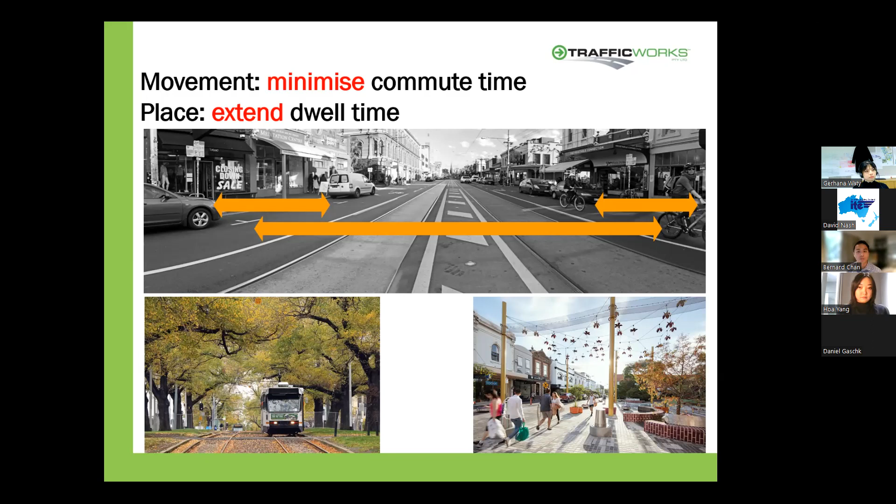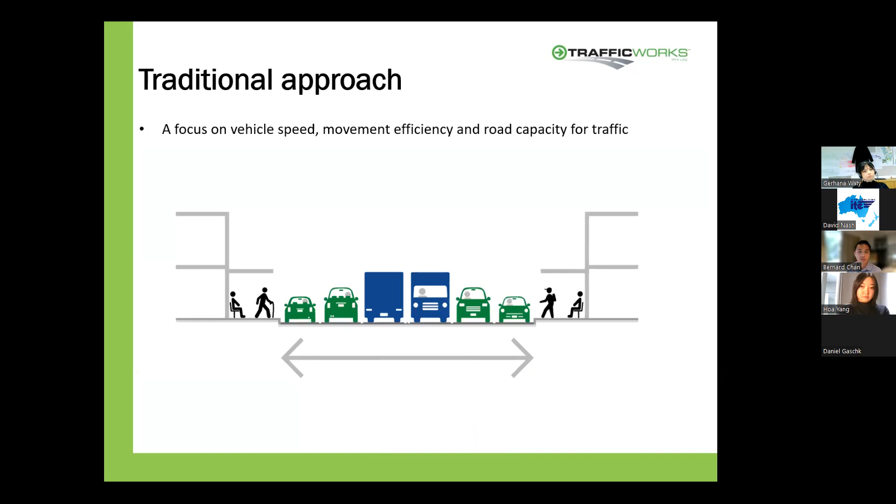15 years ago, we focused on vehicle speed, movement efficiency and capacity—that was our traditional approach. It was all about moving how many vehicles, mostly cars and trucks, we could move, and a focus on dedicating road space to these vehicles.

About 10 years ago, we made a step change to smart roads and included on-road public transport, pedestrians and cyclists, and shifted our thinking to the number of people we're moving, not just the number of vehicles.

And now, movement and place takes us to the next step. It's an integrated transport approach, bringing together transport and land use. So we're also now taking into account what's happening on the side of the roads and treating roads and streets as places in their own right.

Movement and place is not a new concept, and we're not the only ones adopting this—it's happening everywhere around the world. There's quite an international community of practice, and we're not reinventing the wheel. We're just taking the parts that work to suit a Victorian context from other states and countries. So the Victorian movement and place framework is largely based on London's Link and Place, and it's just evolved from there.

Let's talk a little bit about the street space allocation challenge, as I'm sure a lot of you will be experiencing. When planning and designing streets, the allocation of street space is always strongly contested. This is particularly the case in locations such as activity centres, where there's high traffic flow conflicts with popular places and key destinations. So movement and place can really help us with that challenge to allocate the road space equitably.

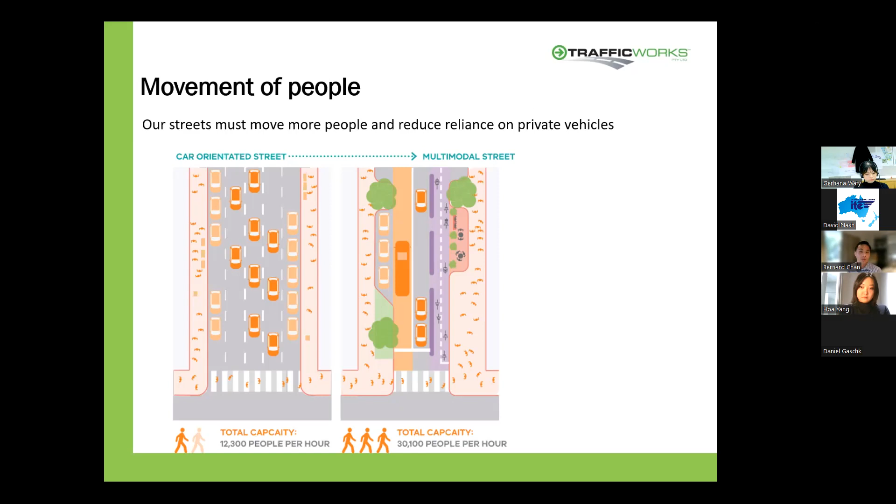In September last year, a study was commissioned by RMIT and Monash University. In that study, they looked at 57 sites located in major activity centres, around 10 kilometres radius from the Melbourne CBD. Each of these sites was measured in terms of the amount of street width provided and used by each mode of transport.

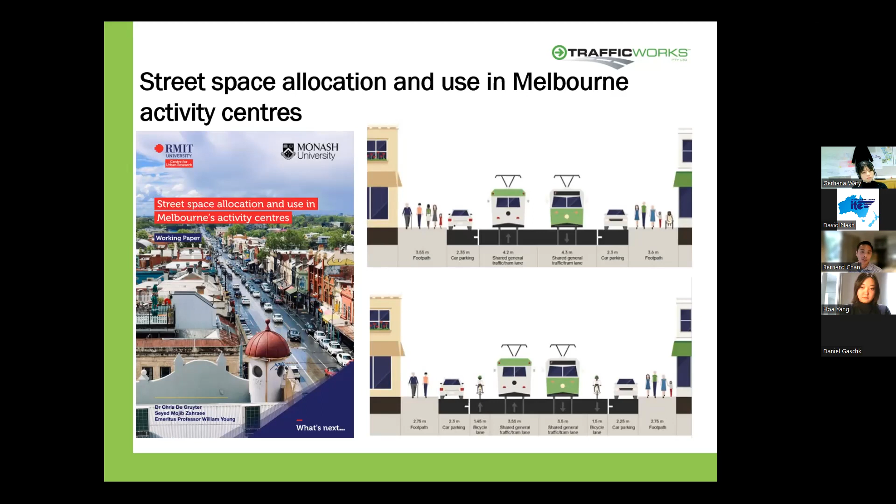An understanding of current street space allocation and use can really help us identify locations where street space could be allocated more equitably to users. This is particularly relevant in areas where movement and place objectives are in conflict with one another, such as in activity centres. In the study, observational person counts were undertaken, and these were classified by transport modes.

These measurements were undertaken at each site and converted to a concentration of people per kilometre to determine the usage of each mode. It was found that when averaged across all sites, space for pedestrians was significantly undersupplied. Footpaths accounted for only 33% of the total street space, yet pedestrians accounted for over 56% of the people per kilometre of road space.

The exclusive tram lanes, general traffic lanes, and tram and bus lanes were found to be slightly oversupplied. The elements found to be greatly oversupplied were on-street car parking, shared general traffic and bus lanes, and surprisingly, bicycle lanes.

A key takeaway from the findings is that space for pedestrians could really be increased at some activity centres. This could potentially be done through converting existing on-street parking, as in the case with the recent emergence of parklets. However, there is great variability between sites, which highlights the importance of a site-specific approach. So this is where the movement and place approach comes in.

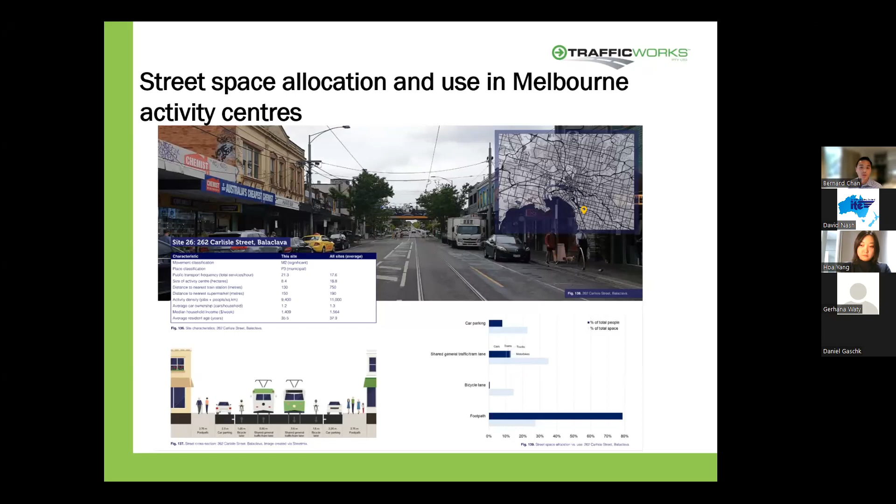I'll give a brief overview of the Victorian Movement and Place framework.

The framework examines the vision and performance of transport links against four themes: movement, place, safety, and the environment. The process to assess how these links are performing against the aspirational states takes us through four different modules of the framework: network classifications, network performance, options development, and options assessment. I'll briefly cover those four modules now.

Module 1, network classifications - this is where each link of road can be plotted in a 5x5 matrix. Each classification has a definition, with place classified from P1 to P5, with P1 being a state significant place, right down to P5, which might be a local street that you live in.

Movement also has classifications level 1 to 5, with M1 being corridors catering for mass movement of people and goods, so your freeways and major highways, all the way down to an M5, which might be your local streets.

The movement classification itself, however, doesn't add a lot of value until you unpack the different modes of transport that make up the M classification. In our framework, there are 8 different transport modes recognized: rail, tram, bus, interchange, walking, cycling, freight, and general traffic. Each of these transport modes also has its own classification system.

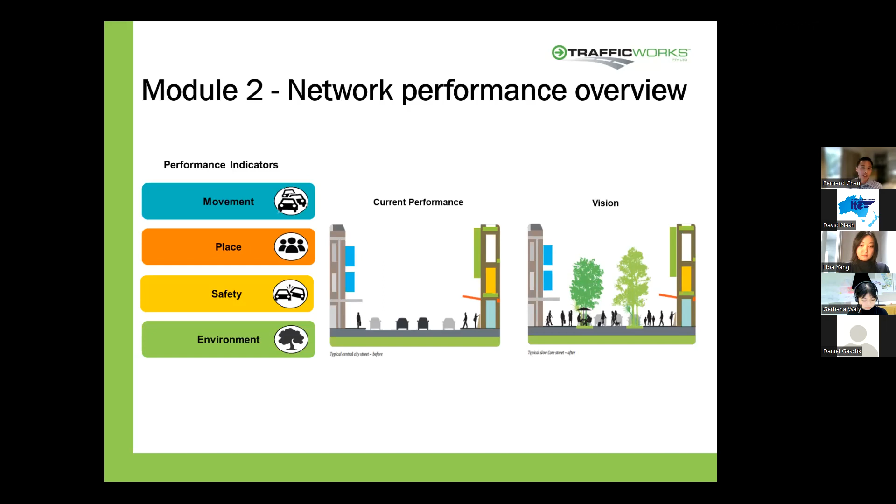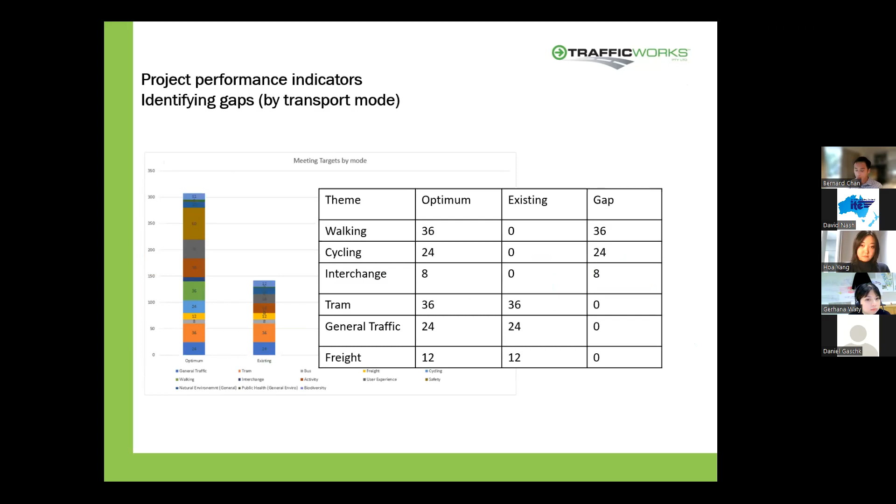Once we have an understanding of the gaps in your project, we can then derive our strategic project objectives. This example here is just of Spencer Street outside Southern Cross Station. These objectives will help shape your project options, which, moving on to Module 3, is options development.

Once we've established our vision and examined it against our existing conditions to identify the gaps in the network, the next step is to identify our project options to address the identified gaps. There are a lot of guides that have been developed to assist with options development.

The first group of guides is our roads and street design guide, which consists of the urban roads and street design guide, the rural roads typologies, and the growth area handbook. There's also a series of modal design guides, so cycling guide, walking guide, etc. All of these design guides are supported by application guidance, such as the user guide and the movement and place technical appendix.

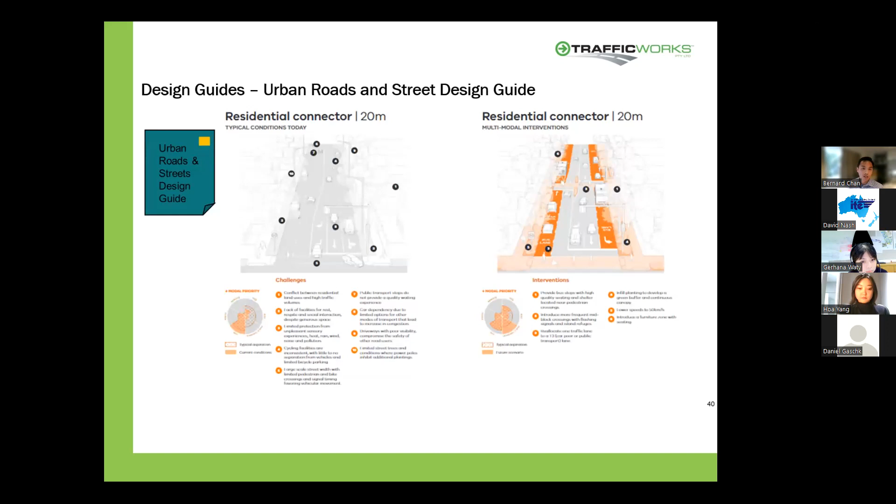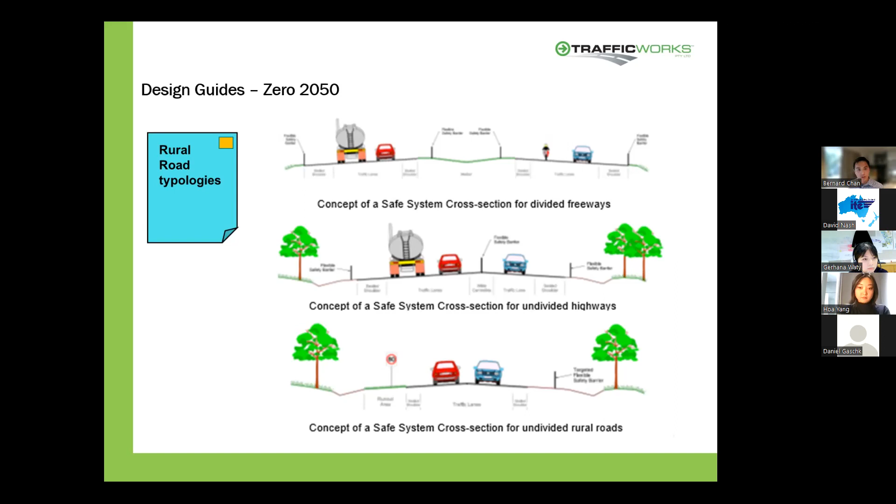It's also important to note that movement and place in Victoria applies to all roads, including high-speed rural roads. The rural road typologies guide will give cross sections for rural roads with a focus on safe system, making sure we've got a safe system cross section for all our rural roads.

So the framework can really help with providing that language and assist in creating that conversation in decisions on how to reallocate street space.

Now I'll talk about how movement and place can integrate different disciplines and the importance of doing that. The movement and place framework provides a unified approach to thinking about roads and streets, and allows practitioners to work together with different disciplines and perspectives to reach a shared understanding and collaboratively develop solutions, and also facilitates conversations between government, practitioners, and the community.

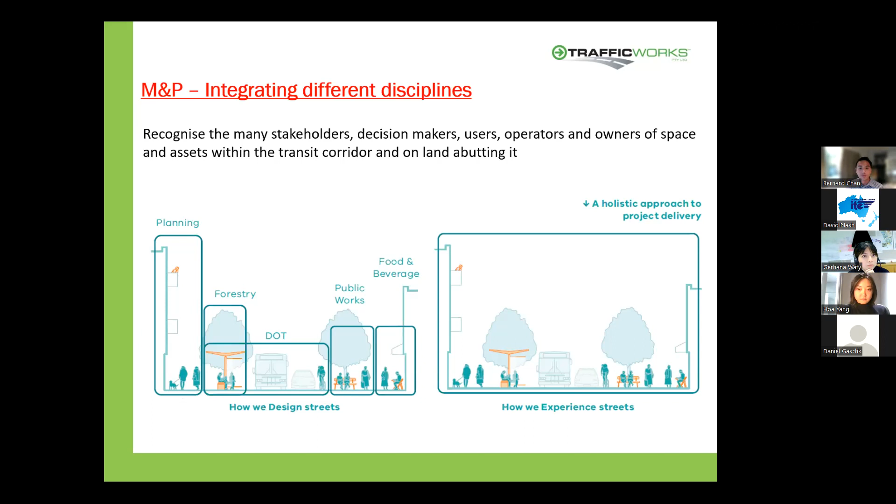This is a more local example, our very own early application of movement and place: the Ringwood Station upgrade and boulevard treatment. In this project, better priority for pedestrians was provided between the Eastland Shopping Centre and Ringwood train station with the implementation of a raised pedestrian crossing. With the introduction of the Ringwood bypass, this allowed Maroondah Highway to be reduced from 3 traffic lanes to 2 traffic lanes in each direction, and the speed limit was reduced from 60 to 40 kilometers per hour to better cater for pedestrians.

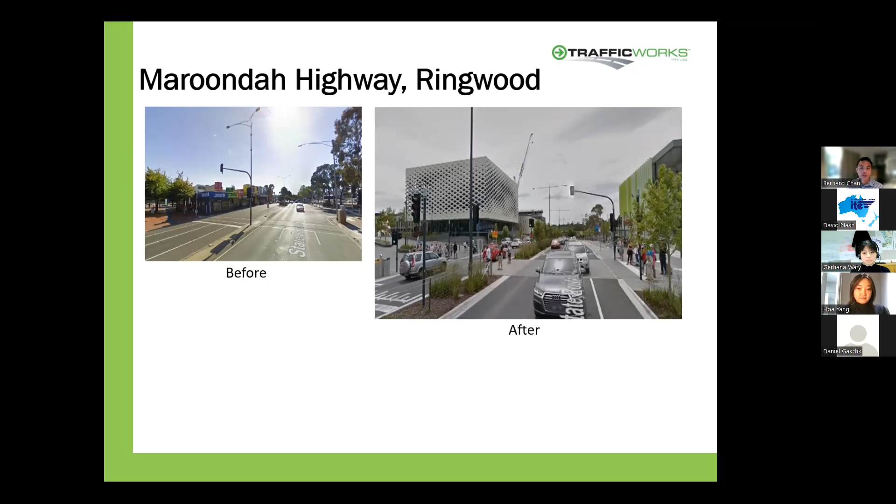Now I'll talk a bit about some examples of how movement and place has been applied in street design, and I'll talk through some of the projects I've been involved in.

Here's an example of a project that Trafficworks completed in partnership with Hansen for the Wyndham City Council. For this project, we reviewed the modal classifications for all the streets within the municipality, reviewed local strategies and future planned projects, and from that established the ultimate active transport network within the municipality. Each identified route was then categorized into street and path types, and this was used to inform a street design guide. Gerhana will talk a bit more about this project in her presentation.

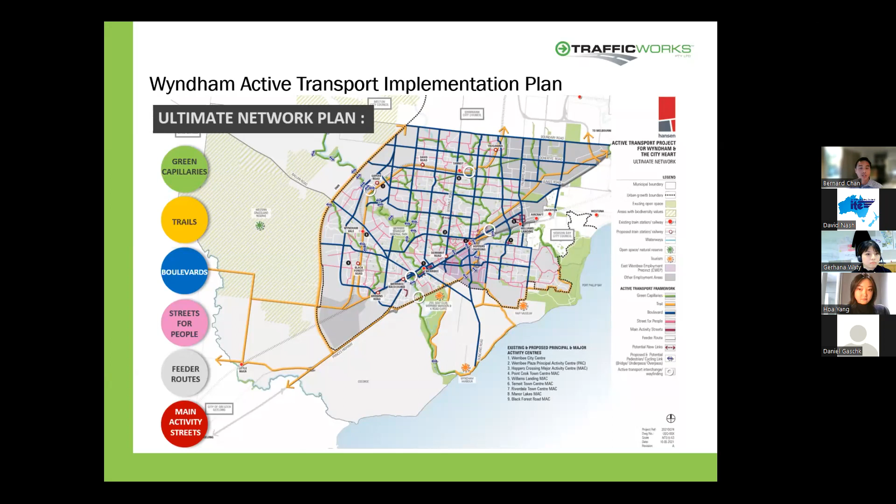This is another example of a project that we completed in partnership with Hansen. This involved the preparation of a street design guideline for the City of Glen Eira. So on this project, we married up the movement and place framework together with Council's integrated transport strategy to come up with a street design guideline that will assist them in determining street typologies and aspirations based on the road hierarchy and classifications. Gerhana will talk a bit more on this project. It's quite an interesting one on how movement and place was applied.

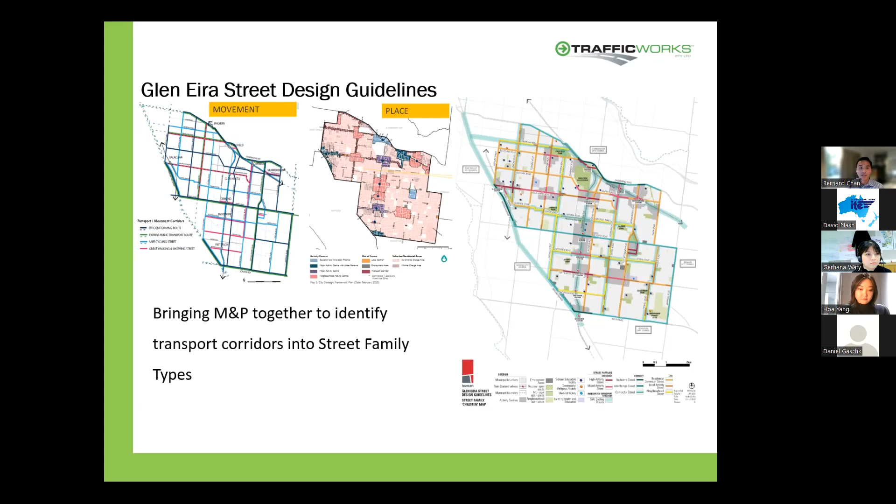We've also been using movement and place on various bicycle feasibility studies. So for a project that we did for City of Melbourne, for Courtney Street, movement and place thinking was adopted in identifying the benefits of a proposed road closure to improve bicycle and pedestrian safety. And another project we completed for Bayside, which involved identifying routes which were suitable for protected bicycle lanes. Movement and place classifications was utilized as a criteria in a multi-criteria analysis.

So in Flinders Street, we also looked at protected bicycle lane feasibility study for the City of Melbourne. This was quite a complex project, given Flinders Street has so many competing modes and limited road space. The movement and place framework was critical in understanding the modal priorities, and that was instrumental in helping us to establish the project options.

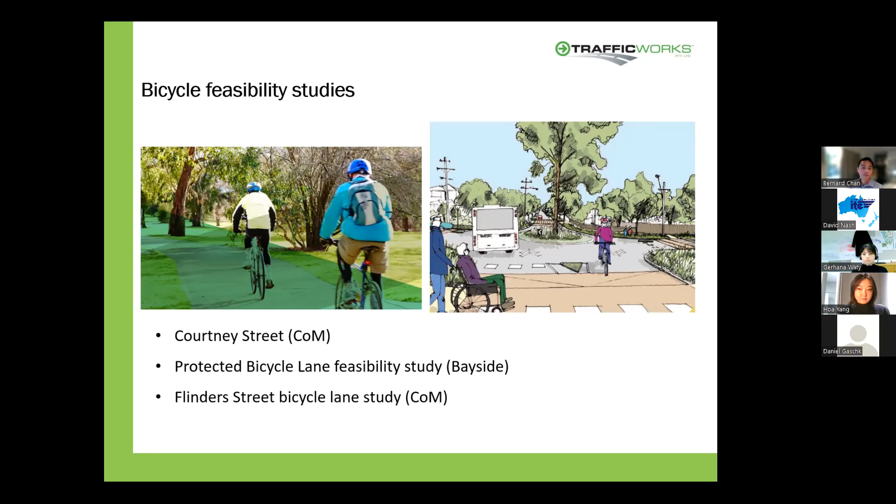It's also been used on a lot of streetscape projects that we've been involved in. So the first one was the Streets for People project we undertook in partnership with Hansen for the City of Darebin. The treatments that we recommended along each of the corridors that we looked at was based on movement and place classifications along the routes.

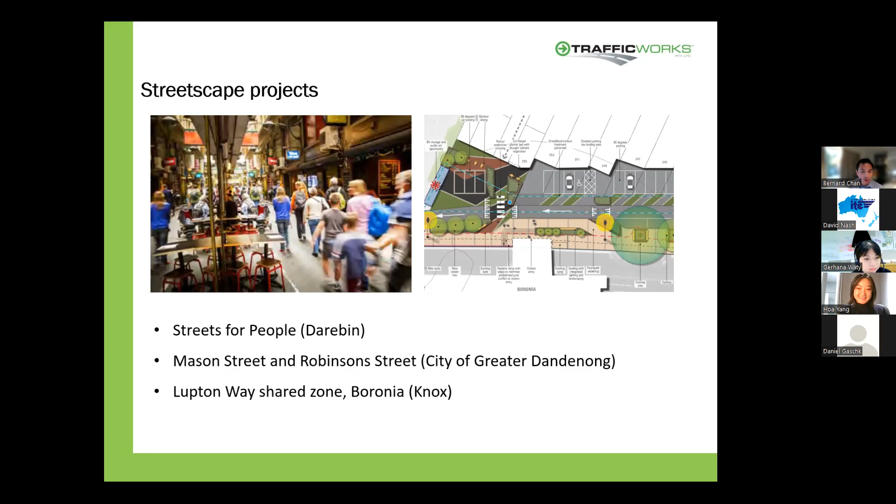The second one, Mason Street and Robinsons Street, that we completed for City of Greater Dandenong, again in partnership with Hansen, movement in place principles were adopted in the development of options. And the third one there, Lupton Way Shared Zone, was another interesting one that we completed again with Hansen, where there were competing pedestrian and cycling priorities with back of house loading and waste collection demands to balance.

Apart from projects, the framework can also be used in the road operations area. The signals area within Department of Transport uses movement in place to undertake signal route reviews. There's a guide and a number of matrices that looks like this one that helps prioritize modes at signalized intersections.

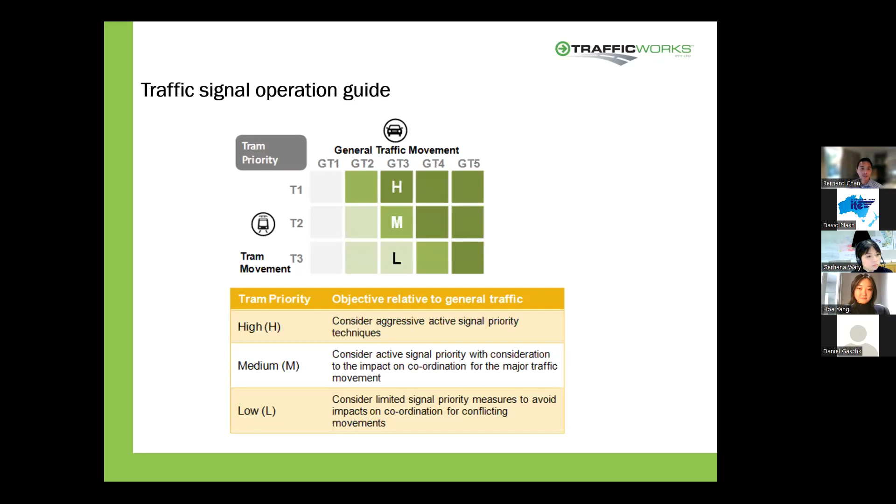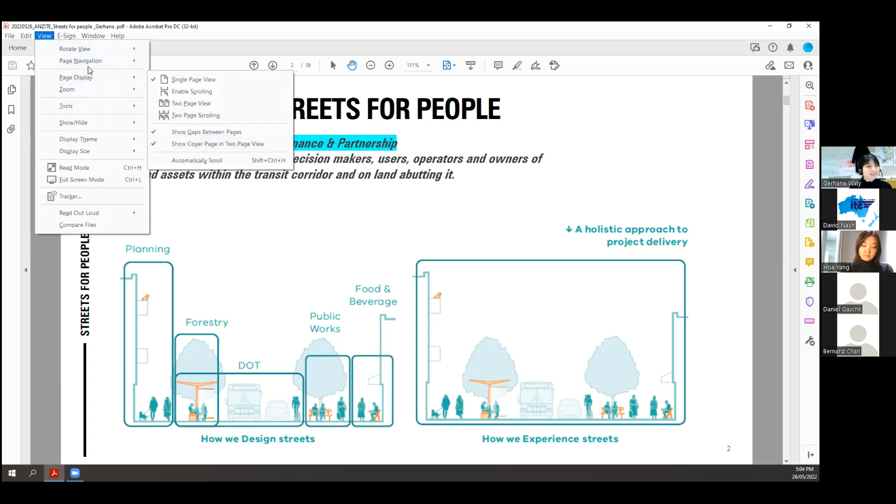That's part of the key ethos in terms of how we try to deliver these kinds of projects in partnership with Trafficworks.

The two projects I'm going to share with you - one is Glen Eira and one is Wyndham - are completely different contextual settings, very different in terms of landscape setting as well. But what's important is the strength of council strategies and the DOT movement and place framework in laying the foundation and providing a really useful starting point for us to deliver interesting and tangible outcomes over time.

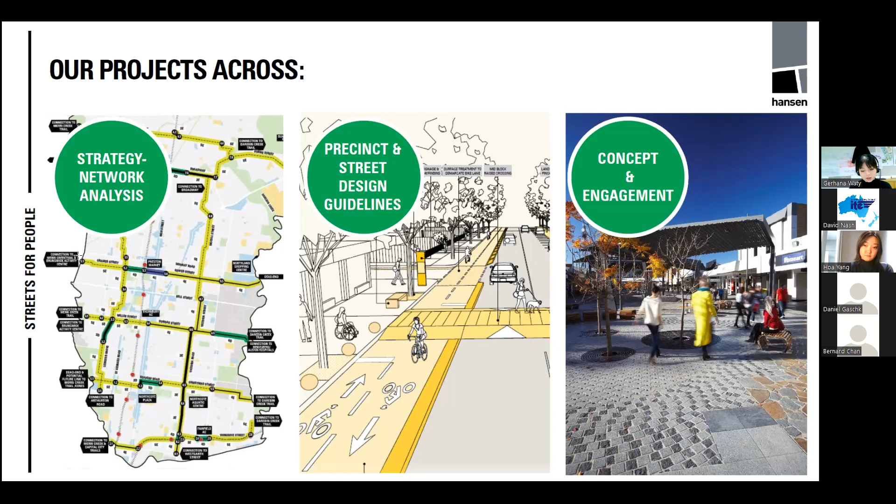So we all know where Glen Eira is - it's one of the middle ring suburbs, a very green municipality I must say, and pretty rich in public transport in terms of train, tram, buses and so on.

What's useful in the Glen Eira setting is that the council has declared that 50% of their transport or traffic will be transferred to active transport in the future. To deliver that kind of vision, they need a serious commitment to delivering good streets that support non-motorized transport.

In addition, they have other issues like urban heat island and depleting canopy tree planting within the public realm. So there are compounded issues that movement and place need to consider in addition to just the functionality of the transport modes.

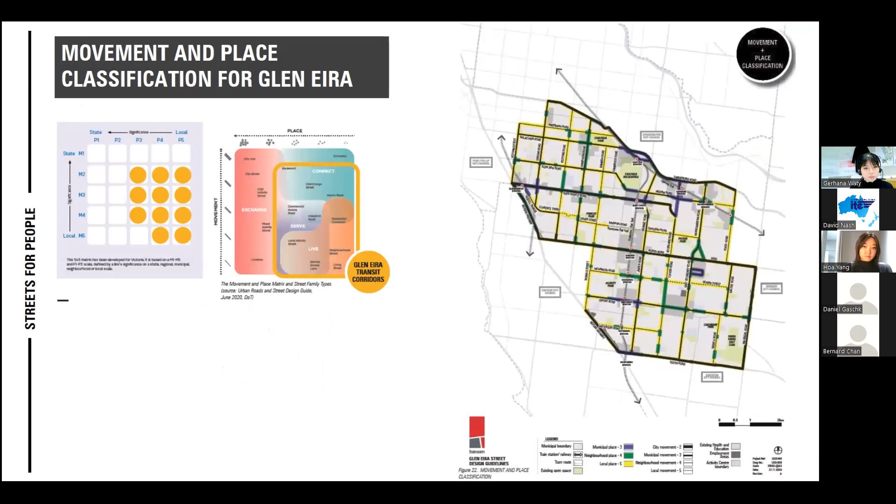So what we did in Glen Eira is really translate Council's ITS, which surprise surprise doesn't really line up with DOT's movement and place. For example, Centre Road in Bentleigh is identified as a great shopping walking street, which makes sense because it is a high street shopping environment.

However, the movement, general traffic and bus network has a very high level of classification, meaning they have high priority in terms of making sure general traffic actually goes through. So the two don't necessarily line up very well, but usefully DOT is also quite open to suggestions with regards to refining some of this movement and place, provided there is a strong justification and strategic rationale as to why those classifications must be reviewed or, in some instances, amended.

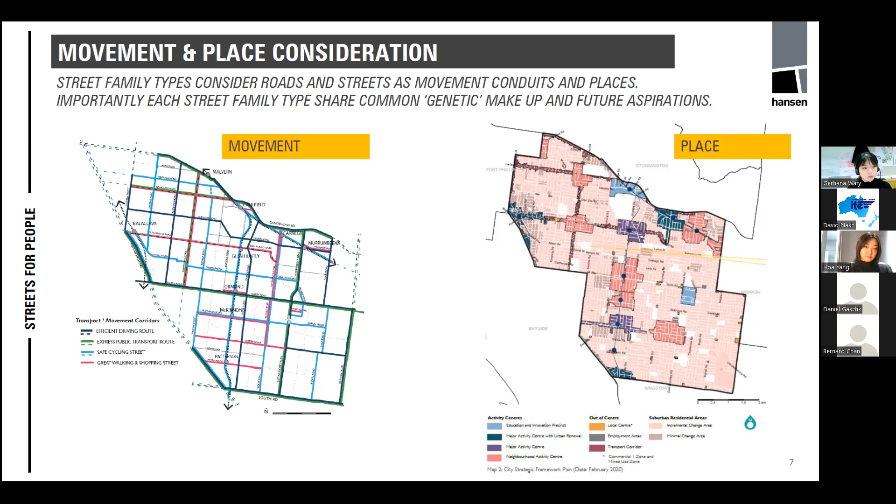A really good example is the East Village Urban Renewal Precinct, which previously was Industrial 1. So naturally the movement categorization or freight categorization is very high. But if we think about the strategic direction of where this place is going in the future, it's very much a people-oriented space. As such, the movement classification must be reviewed and amended to reflect the future designation of that place.

So without going into too much detail, helpfully what we did in the end is create a place-driven street typology to inform the aspiration and the modal priority of different streets within the strategic corridor of Glen Eira.

So whether it's still high general traffic movement, the aspiration in the ITS has a lot of strategic justification to demonstrate why place value is actually what drives the vision and what needs to happen in terms of prioritization of movement and efficiency for what the future street will look like. And mind you, it's not just the streets, it's also the land use implication on what will happen on sites abutting these strategic corridors.

Will future development support retail activity that spills onto the street? Will some of these streets support a cycling corridor that connects to schools and parks and whatnot? So all of this becomes a language, or a kit of parts, that the community, landowners and decision makers understand, can visualize, and can commit to with regards to its delivery.

So we're not talking in technical terms or technical language about general traffic classification, this and that. We talk about creating a boulevard here, creating a mixed activity street here. It has a different level of services, a different level of quality and vibe in terms of place for people.

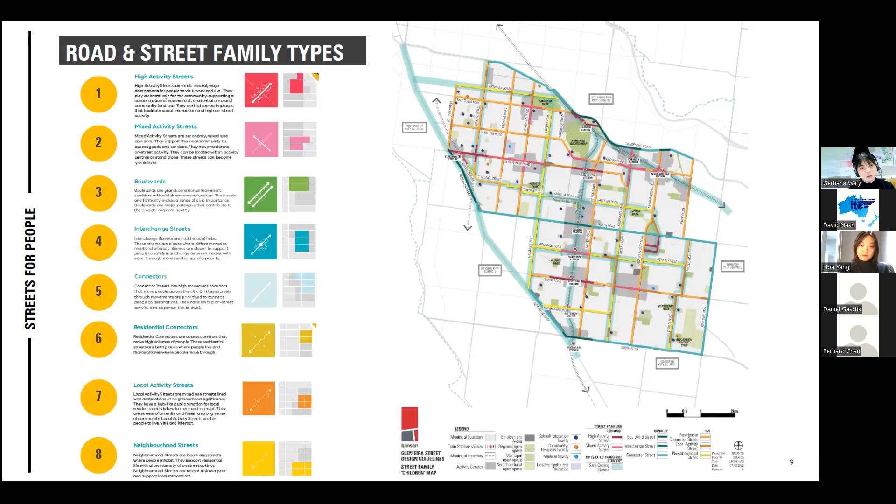So I'm just going to flick through some examples here. For every street type and strategic corridor, we show the existing cross sections and the challenges associated with that. In some areas, it's not about providing a linear footpath along a strategic corridor, rather it's about creating safe crossings and a safe network of feeder streets, which becomes the important factor in delivering the overall vision.

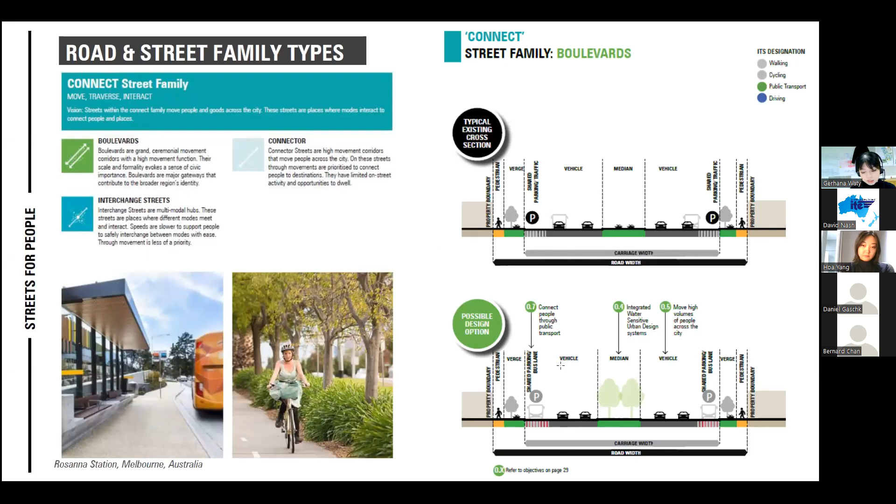And at the bottom here, we give them a couple of design options in terms of what the cross-section may look like, and what negotiation points must happen to deliver the vision.

Same example here: Connector Roads interestingly has a role in carrying public transport and general traffic. But as we know, even though the corridor is identified for primary driving routes, pedestrian amenity, safety and stress level still must be considered. So it's not about saying pedestrians aren't considered, it's actually more important to provide a sense of separation, a sense of buffer to reduce that level of stress, because a lot of the time these connector roads are the ones connecting key important destinations together, and they're the most direct, so commuters love them.

Not your recreational users, not the young population who are using the streets, but commuters - more confident street users who rely on these direct connections to get to places.

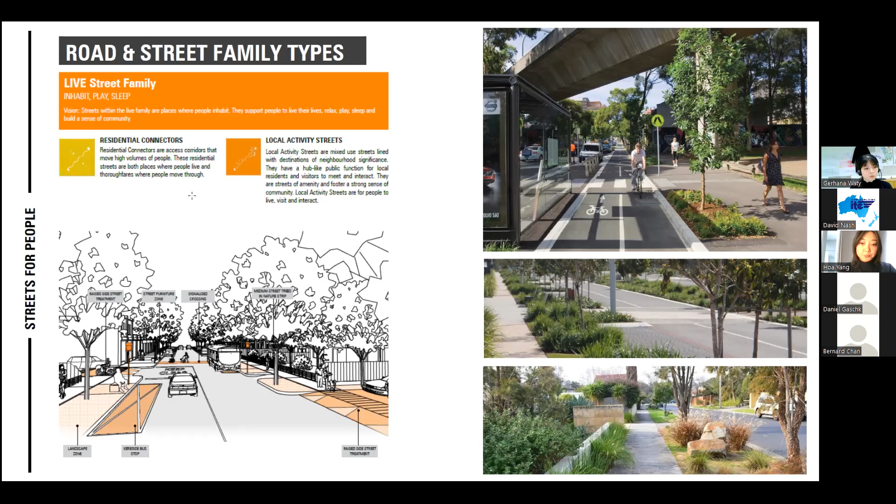So in that regard, amenity, shade, visual interest, wayfinding—all that kind of stuff are still really important considerations in addition to providing for driving and public transport.

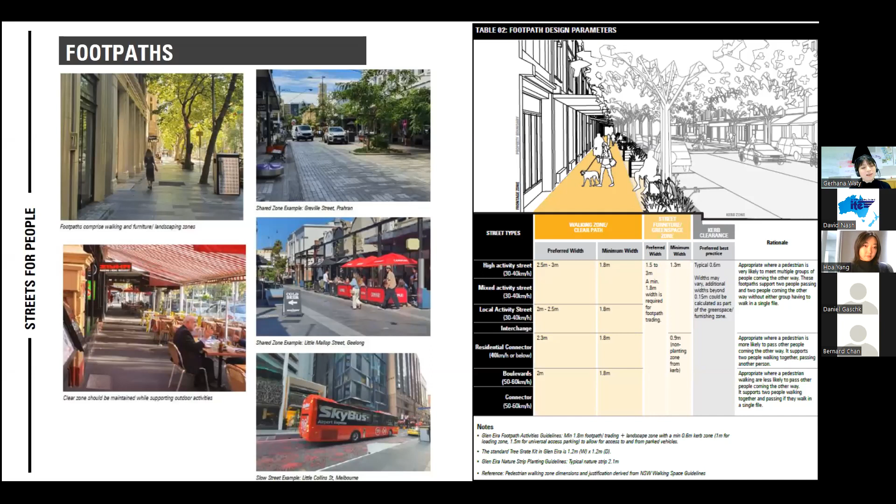So where we land with the Glen Eira context is a really useful kit of parts—what are the elements that make up the streets, and how can these elements be modified and customized to suit different street types? Because not all street types need a 4-meter footpath. Only certain footpaths need that width; some areas can have narrower footpaths because the density isn't as high.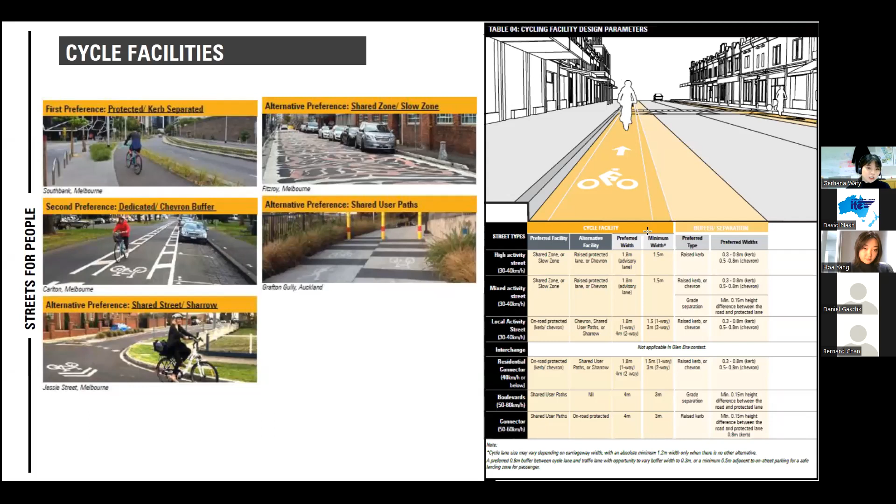And what kind of cycling infrastructure we need to deliver for different street types. Based on that, we've set up this kit of parts and framework to allow councils, decision makers, and community to understand that in high activity streets, we want this type of cycling facility—an expectation of level of service, walkability, and amenity for pedestrians.

Not just in terms of transport, we've also looked at how streets are transient in nature. They're never static—it could be high traffic in the daytime, really quiet on the weekend. So what are the opportunities that allow this flexibility, this transient nature of street life and community life, that contributes to a valuable sense of place? How can we accommodate that without compromising the overall strategic vision for the place?

Where is the negotiable space we can work with in terms of contributing to local economy—through delivering parklets, supporting electric vehicle parking, or deciding if we want more cycling parking rather than car parking because it contributes better to the local economy? All of that is explained and deliberately geared towards street typology.

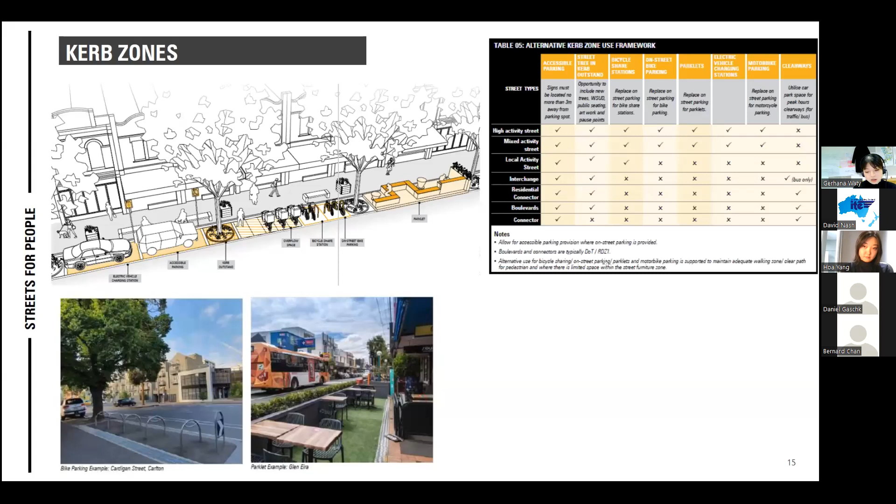So there is a very clear sense of direction, a decision-making process for how we get there. Again, your wombat crossing or zebra crossing may not be suitable on every street, so we're creating a framework to guide that decision-making process.

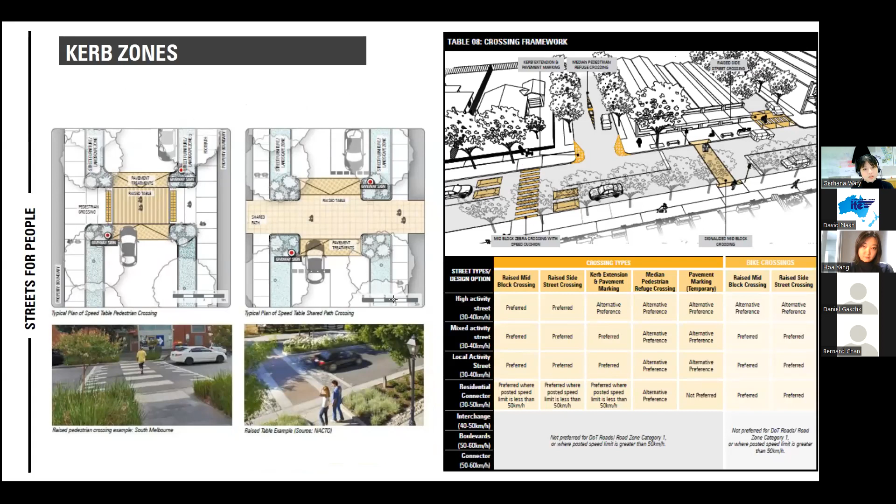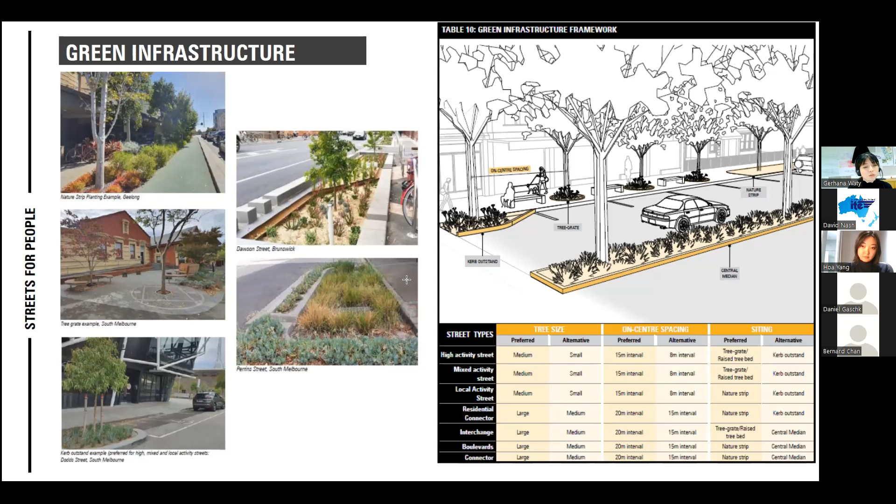And it continues—we go even to the point of green infrastructure, how tree spacing should be facilitated. We know residential connector streets often have driveways interrupting nature strips, so we try to understand the frequency of those interruptions within the Glen Eira context through subdivision patterns, and what the best placement is for trees and tree sizes, because sometimes trunk infrastructure doesn't allow sufficient root space to support the landscaping outcome we're after.

We go into wayfinding—I didn't include a slide here—but we even go into street palettes, because that's also important for reinforcing the difference between street types, so as one travels from one street to another, you understand where you are in the context of Glen Eira.

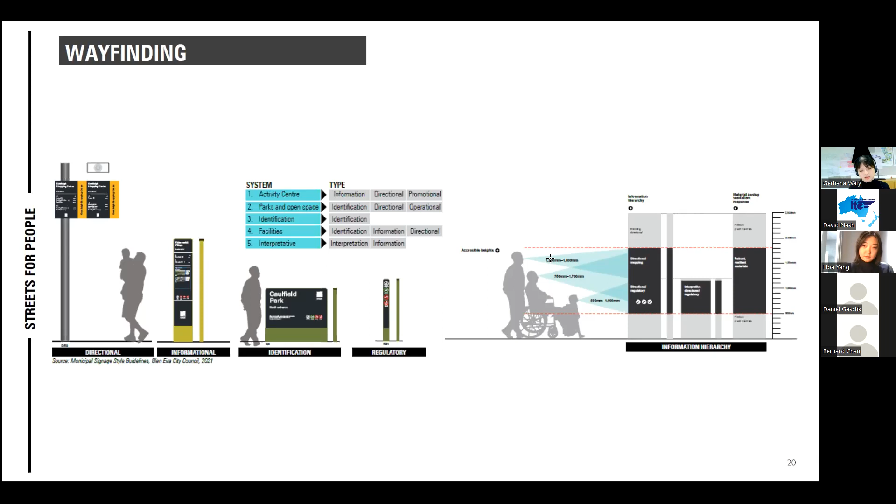Okay, that was a bit of a bullet train speed of presentation. Now I'll take you to Wyndham.

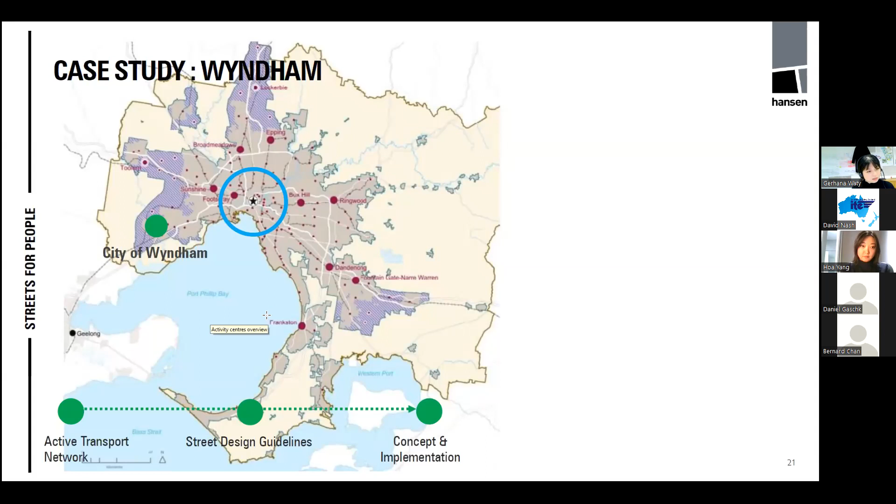Wyndham is quite unique because half of the municipality is established, a small portion in Werribee is historical, and of course there's a swathe of growth area with committed street networks and cross sections that haven't necessarily been informed by movement and place principles. So there's a bit of backtracking and retrofitting, thinking about how that can be addressed now that there's greater expectation on active transport projects that have been committed, and how we can retrofit projects to suit that.

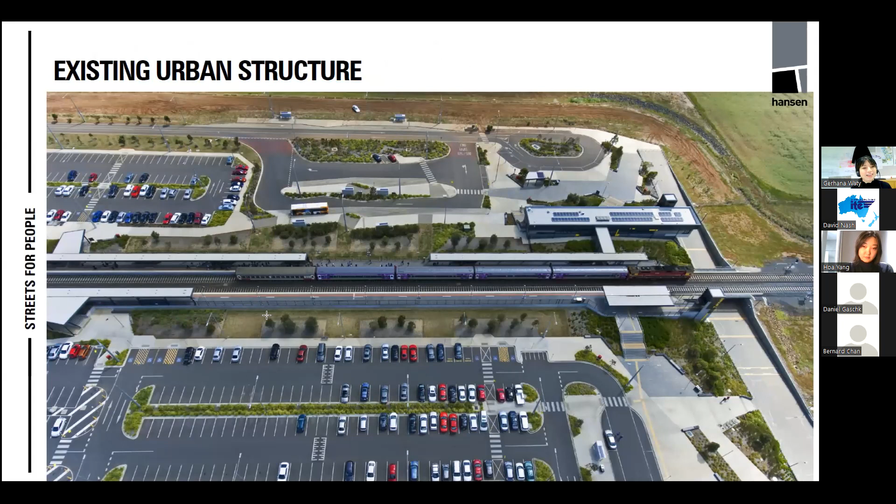As we know, the existing urban structure in Wyndham is partly gridded, partly remote and inaccessible other than by car, but it also has beautiful landscape nature that becomes an important consideration in the network system. One thing movement and place hasn't nailed well in the Wyndham context is the recognition of trail networks—how that's going to be plugged into the overall system, because they tend to be strategic in how they connect different places and municipalities.

It serves so well with regards to community well-being—it's relied upon by commuters as part of their cycling or walking network—but they're often really challenging because they're tight and have a lot of environmental issues. So widening them, duplicating them, or creating connections across the creek or water bodies is so hard.

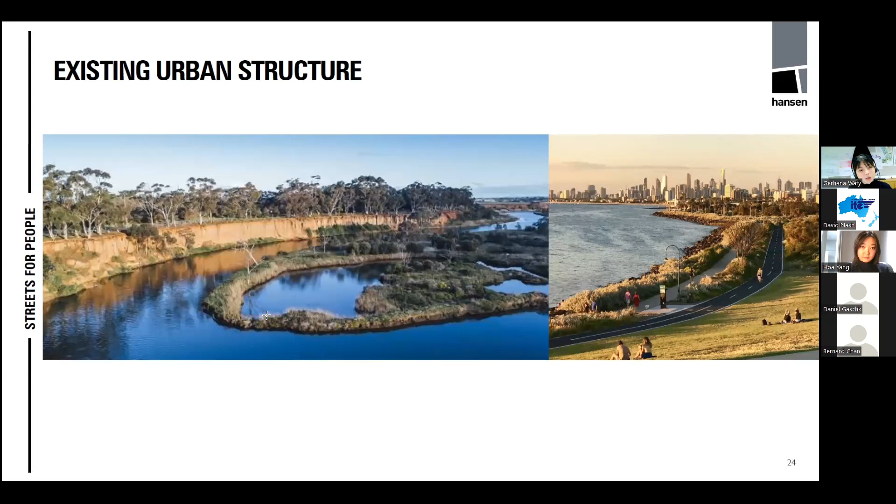So part of this challenge, as we go along applying movement and place, is identifying areas where it can actually be better—can some of these issues be raised in the next iteration of movement and place? So in terms of active transport in Wyndham, the project comprises four parts, which is really interesting.

They're asking us the question: where is our active transport network? What does it look like, and what streets need to function as what? The second question is, what is the guideline, what are the key parts we need to deploy to deliver the vision and the street types we're after? The third question is, what are the project priorities? There are probably 300 projects that will stem out of this, but how do we prioritize so we can demonstrate quick wins, getting buy-in from community and decision makers, and build a culture of active transport.

And lastly, we've started to test this. We go from this macro scale strategic thinking of movement and place down to concept design for Hoppers Crossing, to demonstrate what it actually means in terms of placemaking, design, and projects, and sell that as an idea to get councillors and decision makers excited about committing to projects and creating future structure planning to support the vision as an overall integrated network.

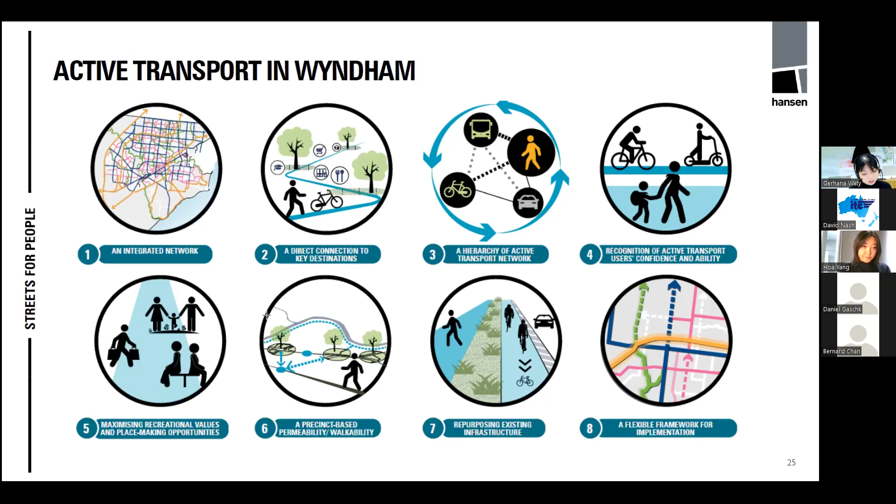Bernard has shown you this plan. Unlike Glenara, Wyndham doesn't have something that shows us this is all great walking streets, this is all our trails, this is all our green capillaries. We have to define that for them.

Interestingly, the green capillaries follow the waterways network, and they're really the pedestrian highway that connects one part of Wyndham to the other. Their connector roads, Derrimut Road and Old Geelong Road, are the backbones connecting different suburbs. They're efficient and regular because they're designed that way, but they're not conducive to inviting the community to walk up and down the corridor. Rather, they're more of a destination because they tend to also support bus networks.

So what support destinations for bus routes are the Streets for People, the pink network, and the white, which is the feeder networks. Those are mostly in council's jurisdiction, so they can make decisions, invest, and fund those projects. But because this speaks DOT's language, we're hoping the partnership between local government and DOT is better because everyone shares the same aspiration. That's part of why this plan is so important.

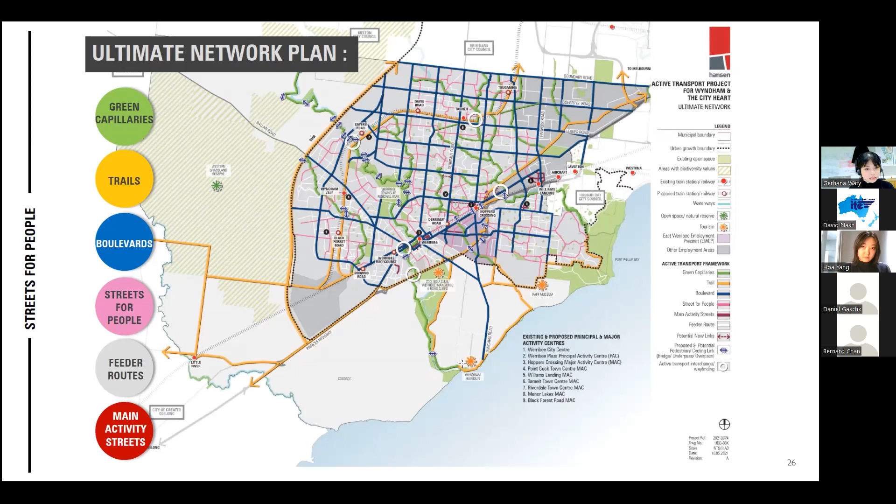Another thing not mentioned here is the role of this trail in supporting not just transport and active transport, but also tourism, because there's a lot of untapped tourism destination potential in Wyndham. The road network may not support the kind of traffic generation wanted there, but it can work very well for creating nature tourism destinations that work well with active transport facilities. I won't bore you with all the description, but you get the gist.

In support of creating the active transport and ultimate network, we also prepared guidelines similar to Glenara's, for Wyndham. We applied that and said, we have all these kit parts, all these options, let's test it in a place that is so not pedestrian friendly: Hoppers Crossing, since it's one of their major activity centers. On the left-hand side you can see it's important to identify the path types.

Again, they're driven by movement and place - more movement, yes, place, but not so evident. When we talk about place, it goes beyond just zoning, into built form conditions, into the kind of land use supporting it at ground level. It tends to understand what key destinations we're creating at the local level, and what amenity we're providing for pedestrians so there are incentives to walk around. The ultimate vision, beyond functionality and capacity and technical things, is really about urban health, community health and well-being, and place health.

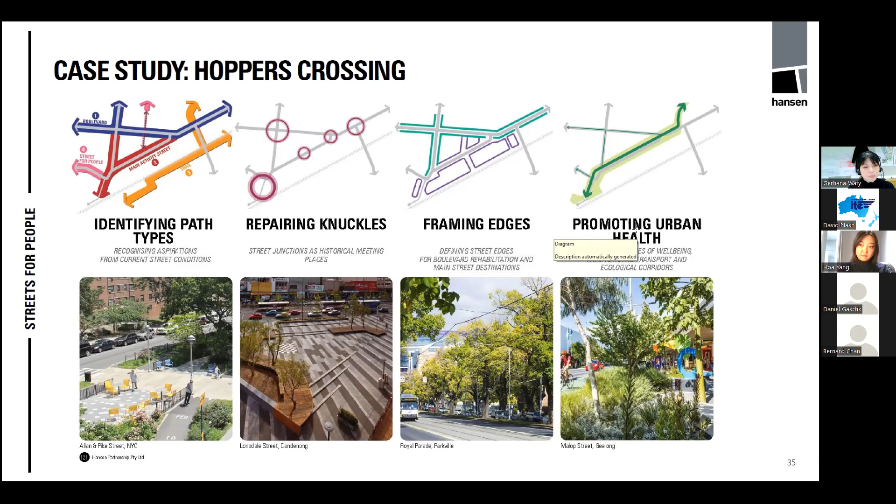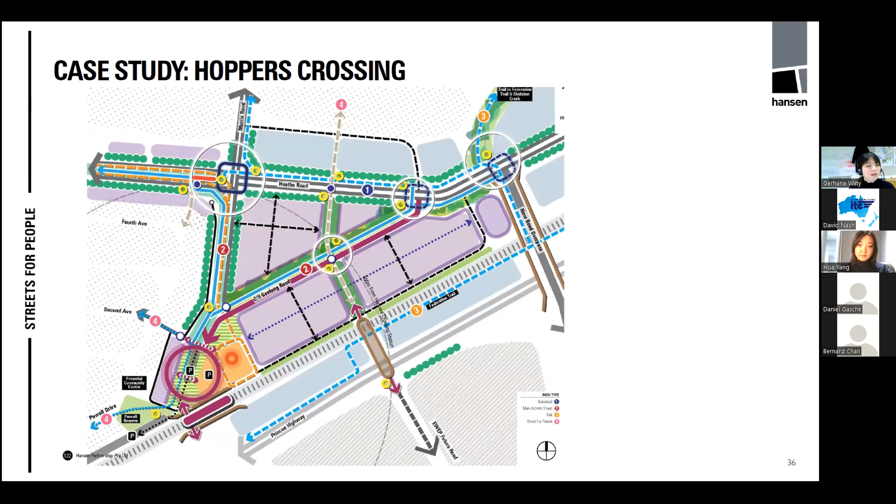So these four key principles become the basis for the concept definition for Hoppers Crossing: how do we retrofit it from a car-dominated place to one that is much more people-oriented, a place that attracts the right kind of investment - one where we turn Old Geelong Road into a linear park opportunity. How does it all work out, and what does it mean technically? So we've created a couple of cross sections.

We work with Trafficworks to work out the functionality in terms of can turning movement be facilitated, can the tram be facilitated, how is the bus interchange going to work. So all of that goes beyond just property boundary to property boundary within the carriage width. It goes beyond just private land, it needs to also be influencing what's happening on the public land.

So out of this process, part of the implementation is actually for council to start preparing urban design framework and built form framework to understand how the private land can help deliver the active transport vision. Part of it could be including building setback for footpath widening, it could be mandating canopy tree planting within front setbacks and whatnot, so that it talks to the public realm.

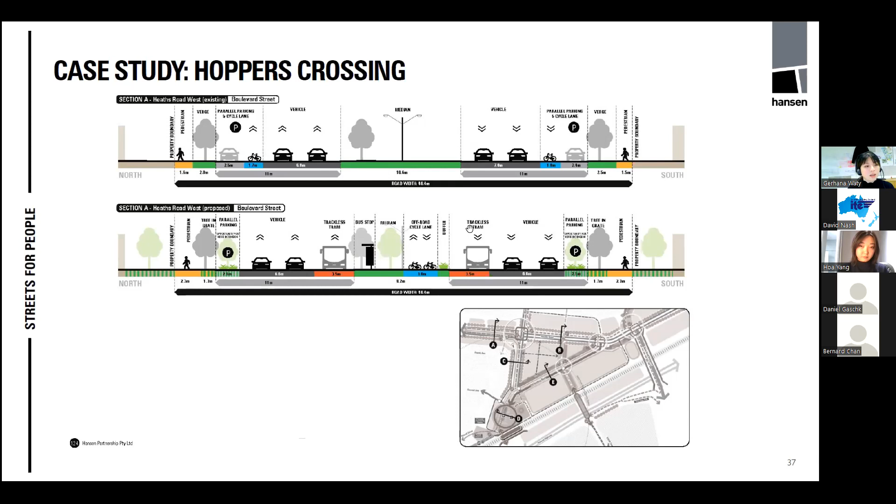Again, we go to the point of creating a landscape concept as a demonstration of how this can be done. And we even cost that whole package for council, in terms of if we are to do this, a couple of steps need to happen and it will cost you this much. So you can start seeing how, in a Wyndham context, we go from the macro level of movement and place as a strategic tool to drive decision-making and to justify why we're doing what we're doing.

It goes to the street design guidelines, so it gives options and a decision-making framework for council, developers, communities, DOT, so that they speak the same language and share the same vision. And we go to the point of concept and placemaking initiatives to then start to make it more tangible in terms of what movement and place look like when it's actually a place, not just a street.

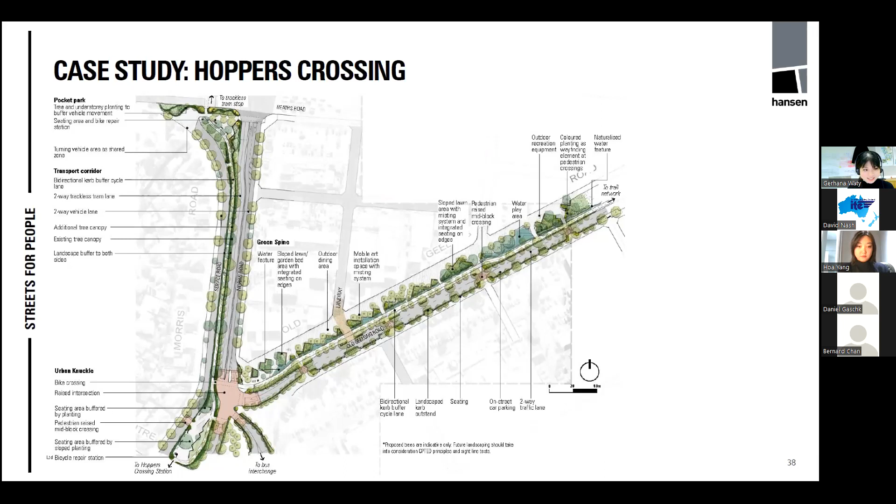With that, I will end my presentation. If you are after my contact details, feel free to screen grab this or get in touch with Daniel. Thank you for the opportunity to share my projects with you.

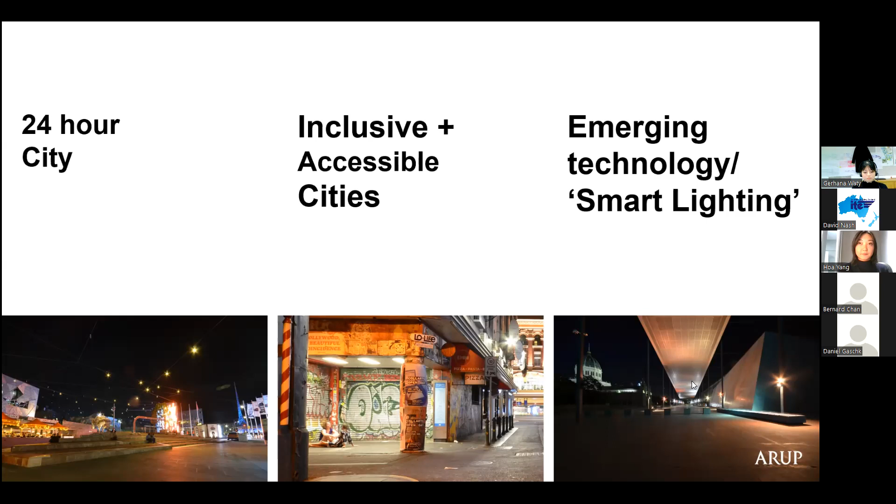So back in 2016, XYX Lab, a research PhD lab at Monash University, in collaboration with Plan International, asked young women and girls in Melbourne to share their experience of the city. They did this through a crowdsourcing app called the Free to Be campaign, where people were able to go onto it and pin specific sites and add comments to where they experienced harassment or assault across Melbourne. This app was online for 3 months and collected a data set of over 900 pins.

So what you see on the screen is a screen grab of what was collected. The red dots are the unsafe sites and the green dots are the safe sites. The bigger the circle, the higher the number of people who pinned it as a safe or unsafe site. The study in Melbourne was a prototype, and similar studies have been conducted in 5 other cities worldwide, including Delhi, Madrid, Lima, Kampala, and Sydney, with each study collecting over 3,000 people's responses.

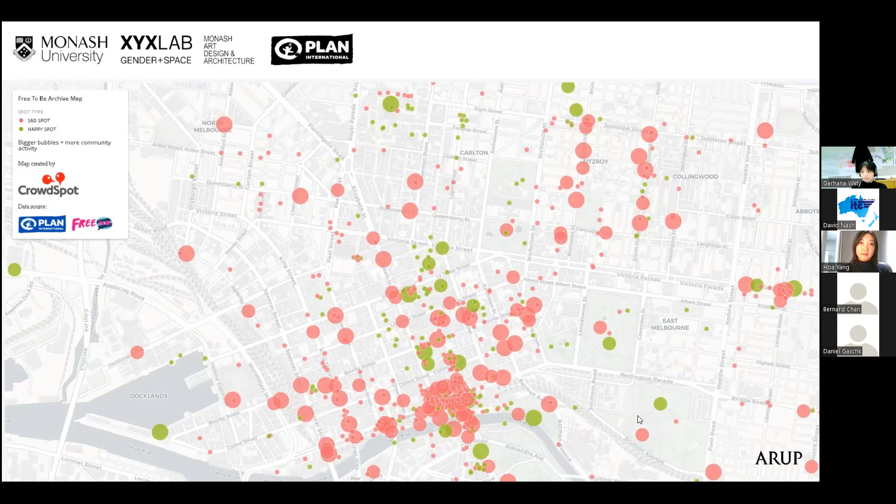Now, I'd been following XYX Lab for a long time, and when these results were released, I wasn't really that surprised. As a person who's visibly a minority, I'm always on high alert every time I'm walking alone at night. Our physical abilities, the way we look, and our past experiences can all affect the way we move around the city at night. It influences whether people avoid a certain part of the city, feel comfortable using social amenities like public transport, or even leave their house after dark at all.

So there are huge social and economic consequences if people don't feel safe enough to walk around alone at night. While this experience of feeling unsafe in the city is widely known, the data set collected from the Free to Be campaign is the first time things like harassment and abuse, which aren't usually captured in official crime statistics, have been linked to physical attributes or urban infrastructure in the city.

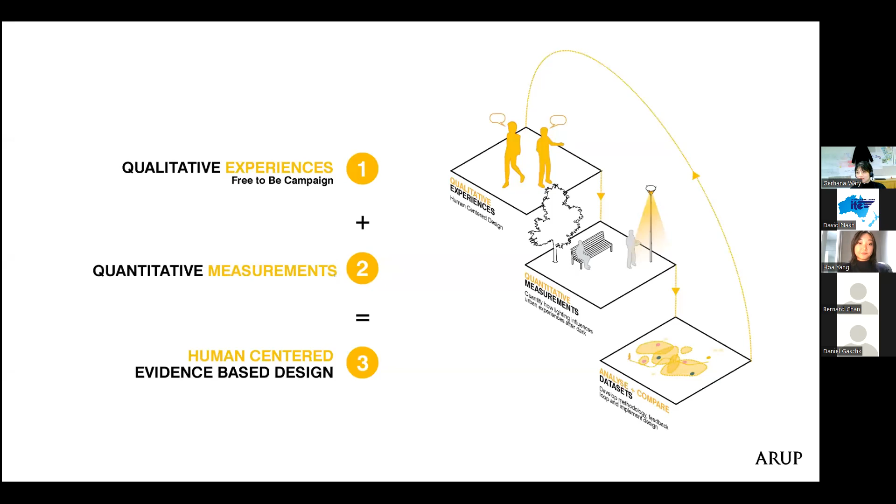And what was really interesting about the findings in the Free to Be study was that over a third of pins across Melbourne specifically mentioned lighting as a contributing factor to feeling safe or unsafe. Outside of social factors, lighting was the highest environmental factor to affect perceptions of safety for women and girls.

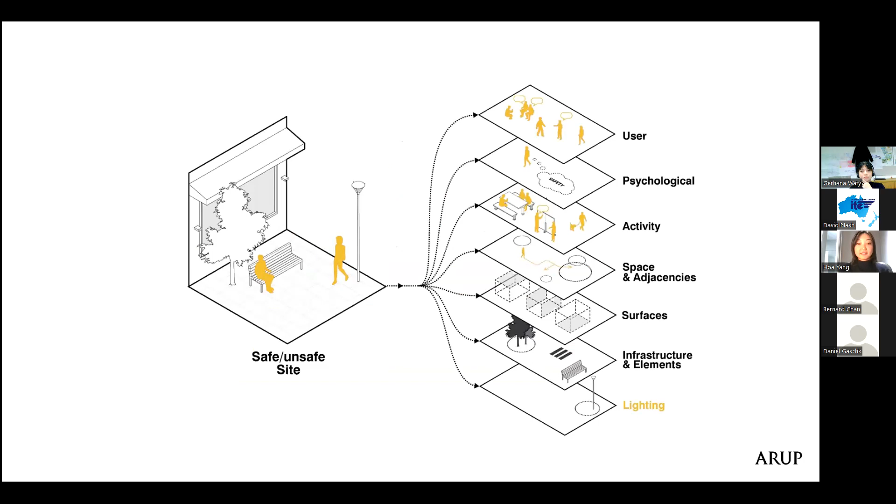The city and our experiences of public space works as a system of layers. At night, I like to think that lighting is the one thing that allows for all of these layers to work seamlessly together by giving us vision. Considered lighting will allow us to enjoy our public spaces at night, while bad lighting can make a space feel harsh and unfriendly.

What we're still yet to understand as an industry is measured evidence that shows how specific elements of light make women and girls feel when they say that it's bad or good, beyond just too dark or too bright. So what we were interested in at Arup was how we can listen to these lived experiences to inform how we specify and design urban lighting for more gender sensitive and inclusive nighttime experiences in practice.

So we got in touch with XYX Lab, and we're very grateful to be able to start a research collaboration with them, to see if we could add some quantitative measurements to figure out a more nuanced way of what it is exactly that makes women and girls feel safe or unsafe from lights in the city.

So we picked 84 sites where the data showed hotspots from the community feedback, and also places where people specifically mentioned lighting. Over 4 weeks, between 9 p.m. and 3 a.m. in the sweaty Melbourne summer, a colleague of mine and I went out and measured 84 sites in total. Out of that, we measured 26 safe spots and 58 unsafe spots.

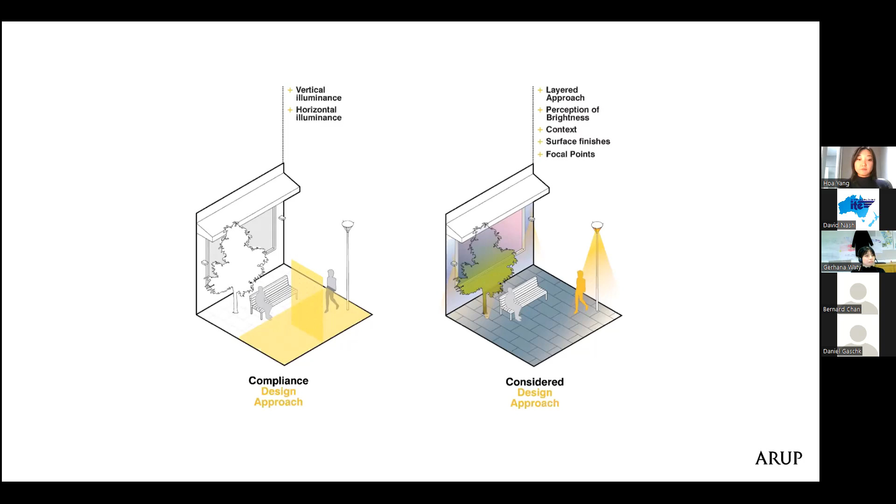Beyond this, the exterior lighting standards are also based on a whole slew of research based on the needs of the Caucasian man, which hasn't really been revised in the past 20 or so years. Our hypothesis for the research was that we should be measuring for more than just illuminance.

One key aspect of this is luminance. Luminance is a measurement that isn't captured in the standards. What it captures is the light bouncing off the surrounding environment back into our eyes, and is what makes the left-hand side of this page feel a lot darker than the right-hand side, even though they're receiving the same amount of light.

So what we proposed was to take into account the overall context of a site and include different things like road colours, finishes, or ambient light from shop fronts, which can all add up to our perception of comfort and safety in the city.

So we measured and analysed 8 different technical lighting parameters per site, where if you were meeting compliance, you'd only measure 3 of these things. We then also analysed the sites with the help of our in-house human factors specialists to look at the vulnerability for things like scales of architecture, footpath width, sight lines, and escape routes.

This is a key part of investigating experiences of the night, because a large part of light is only experienced when it bounces off the surrounding environment. Of the 38 different physical attributes that we looked at, the 4 here on the slide were found to be significant.

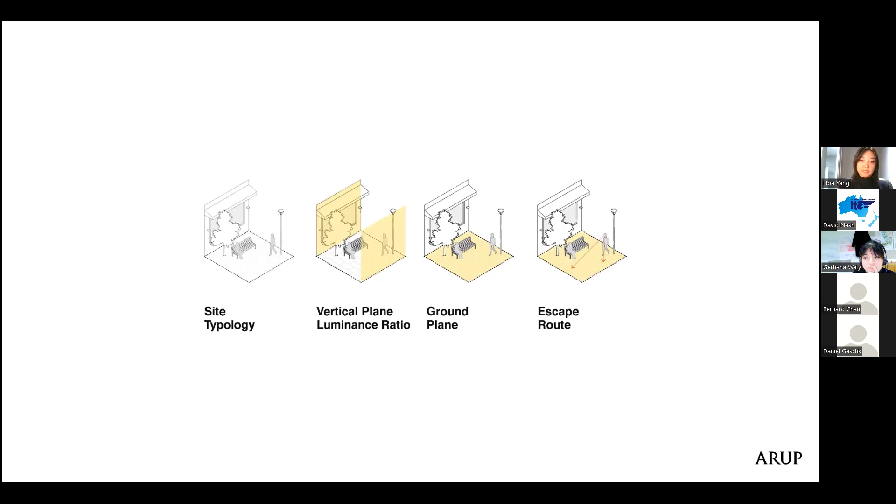Our findings validated our hypothesis and also debunked some long-held assumptions about how lighting can make a space feel safer. We found that brighter lights don't make people feel safer. In general, once light levels pass a certain threshold, a space will start to feel unsafe. Currently, a common knee-jerk reaction for many asset owners is to add more lights to make a space feel safer, but what the data is showing from people's lived experiences is that this is generally not true.

We also found that quality, not quantity, is much more important when it comes to urban lighting. The findings show that the quality of light output is much more important once a low level of light is reached.

One of these factors is color rendering, which is how accurately color is rendered by the light source compared to what it appears to be during daylight. This allows people to accurately see shapes and color and to distinguish the difference between a person approaching them and the bush beside them. Our findings show that being able to see and make out an overall scene in front of you is much more important to women and girls than only being able to see someone's face as they're approaching.

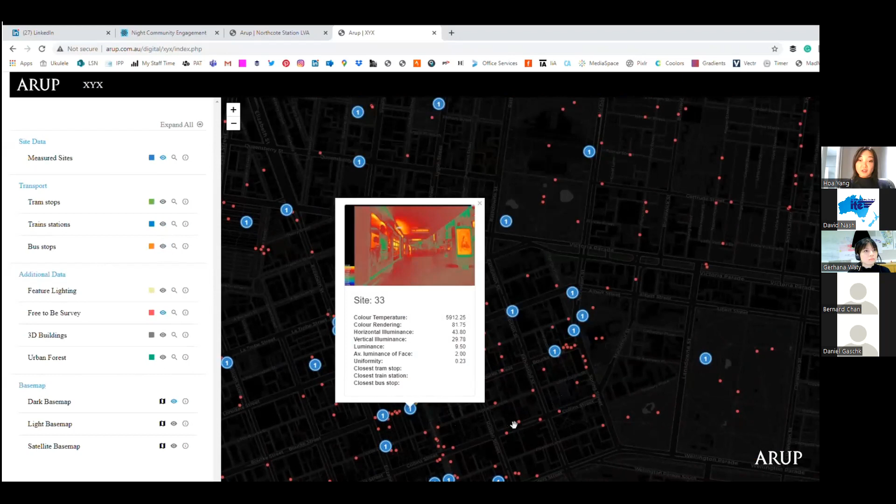Since this research project, we've developed an evidence-based methodology called the Nighttime Vulnerability Assessment, also known as the NVA, as the first step to implementing this evidence-based process when designing for gender-sensitive safety on urban projects. This methodology identifies and recommends practical design changes to nighttime spaces by looking at vulnerability at three levels: first social, second environmental, and third technical lighting.

The assessment looks beyond the standards and weaves lived experiences with the technical components of lighting design and CPTED practices through data capture and analysis to make design decisions aimed at improving community safety at night, which are then validated in our nighttime co-design workshops.

A project we've been lucky enough to apply these findings, or this NVA process, on recently was with the City of Whittlesea, who approached us to develop high-level lighting design guidelines they can use to improve perceptions of community safety at night on their shared user paths.

I saw before that our client from the council, Russ, is also on the call today. So I just wanted to take the opportunity to say that it does take pioneering people in our industry like Russ to take a leap of faith from a typical road lighting approach and engage with people like us in the pursuit to make our cities more accessible and inclusive at night. So massive shout out and thank you, Russ.

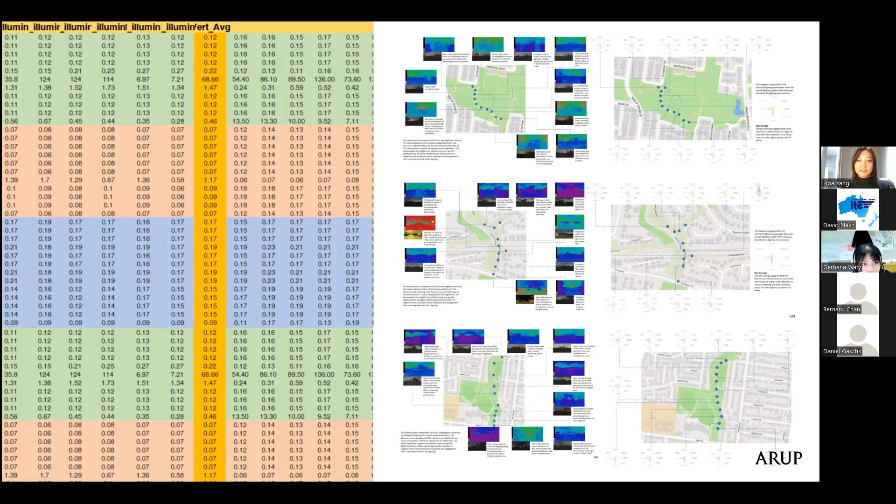What we did was go out to three different sites on shared user paths and did a whole bunch of measurements based on the research methodology. Then we came back to the office and analysed all of that, in particular looking at perceptions of brightness, the luminance measurement I mentioned before. We also compared a lot of the current existing conditions to the baseline of lighting we collected from the research, to see how we might frame the guidelines and the discussions in the workshops, to tease out whether applying those technical parameters within a lighting scheme might benefit the local community.

With those findings, that formed the proceedings of our torch workshops. We run these nighttime torch workshops with community members, using dolphin torches from Bunnings that are $10 each. We've run them before with really technical lighting instruments, and people just didn't want to touch them. So we found that having something easy to play with is a lot more accessible for community members.

So we'll go through a couple of design challenges, I'd say, listening to the experiences of the local community and then giving them the knowledge and tools of how they could use lighting to improve their perception of safety. Then we'll do a couple of prototype things on site to see what the community actually want.

So then what we do with that later on, we consolidate the key themes. With the City of Whittlesea, we've come up with 5 key themes and a design concept package that they can give to consultants working on any shared user path lighting projects. We've also provided them a matrix of technical requirements to aid implementation.

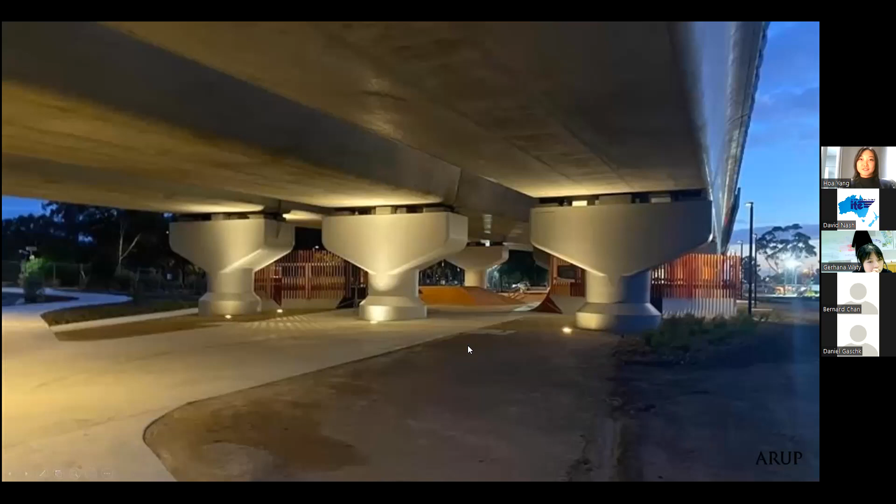In this image, the lights haven't really been aimed yet because I took these images while we were on the site visit. But what we've tried to do is light up the vertical surfaces and create a warm atmosphere that seems quite inviting for people to visit at nighttime.

At the same time, this also allows for this pathway connecting to suburbs to be a lot more friendly and accessible at nighttime because of the gradual brightness of the surrounding environment.

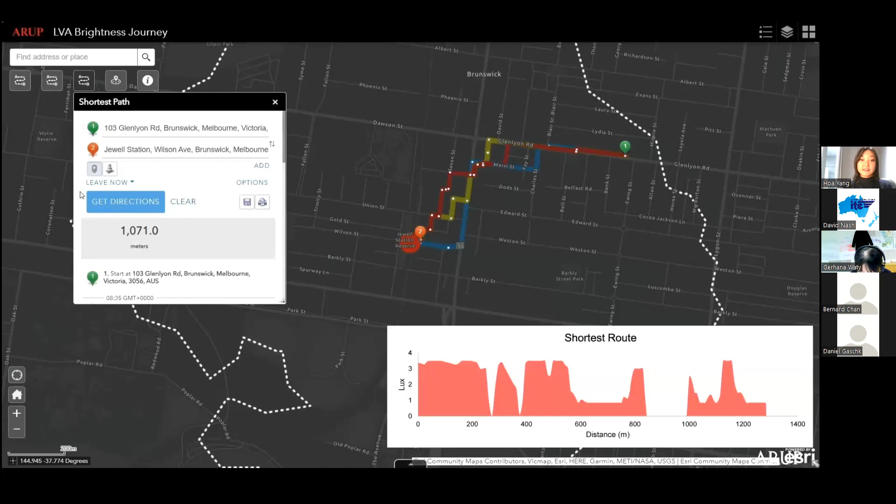Outside of this, we're also looking at how we can use big data and digital tools to look at the experience of nighttime more holistically when it comes to walkability. This is a planning tool that takes the 15-minute neighbourhood, outlined with the isochrone there, and predicts a person's perception of brightness and safety when getting from point A to B at night, to help walkability at a larger scale on precinct design or infrastructure.

We've also started to look at how we can take this methodology and apply a similar approach to develop urban lighting strategies to meet the needs of other marginalised groups, such as age, ability, or ethnicity, and in particular those who sit at the intersection of more than one of these marginalised groups.

In a world that's waking up to all the different permutations of social injustice and inequality, this research has really allowed us at Arup to completely turn the traditional lighting design process on its head and pioneer new methods of inclusive and experience-based nighttime design for people.